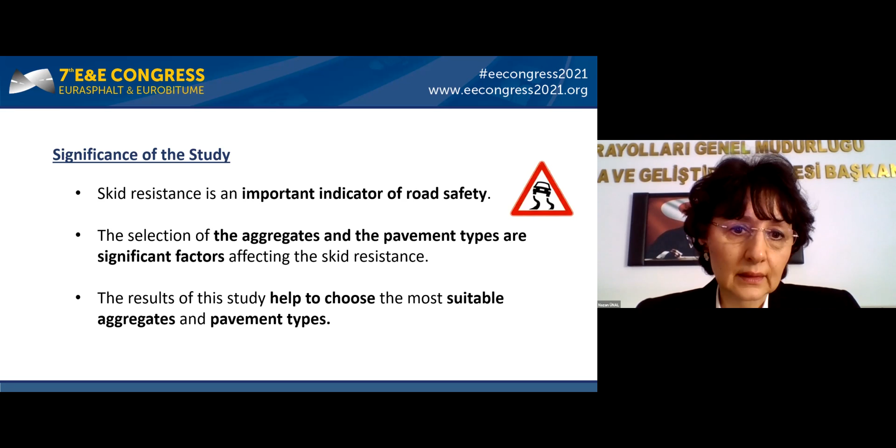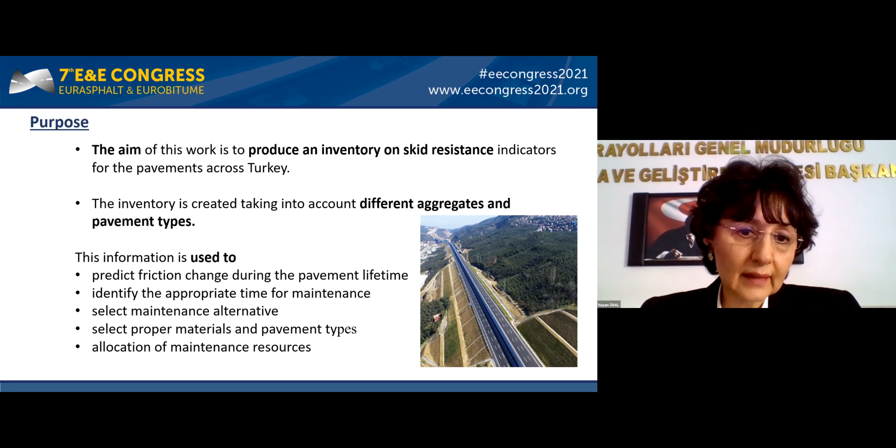The aim of this work is to produce an inventory on skid resistance indicators of pavements across Turkey. The inventory is created taking into account different aggregates and pavement types. This information is used to predict friction change during the pavement lifetime, identify the appropriate time for maintenance, select maintenance alternatives, proper materials and pavement types, and allocate maintenance resources.

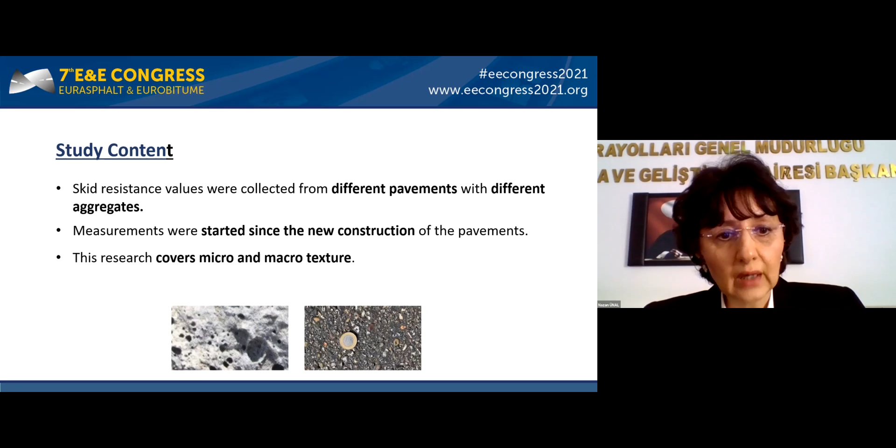Skid resistance values were collected from different pavements with different aggregates. Measurements were started since the new construction of the pavements. The research covers micro and macro textures.

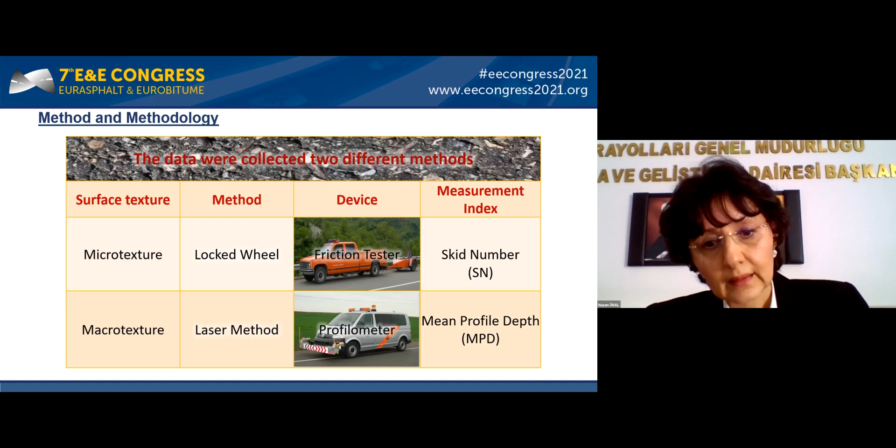The data were collected using two different methods. Micro texture was measured by the locked wheel method using a friction tester; the index is skid number, SN for short. Macro texture was measured by the laser method using a profilometer; the index was mean profile depth, MPD for short.

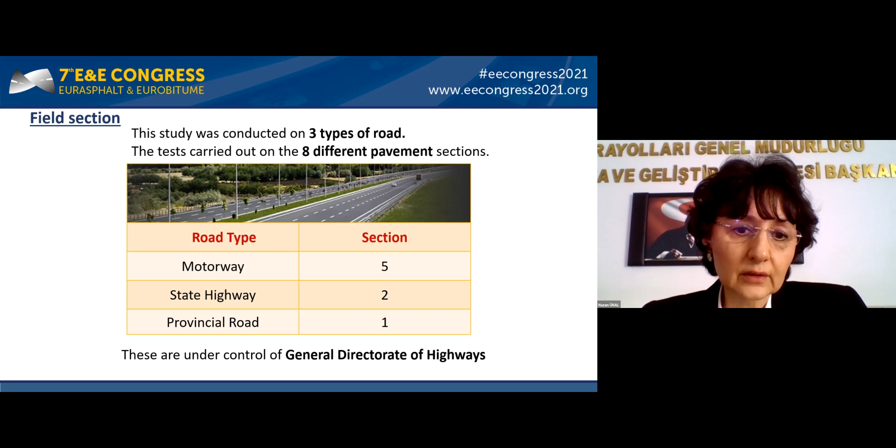This study was conducted on 3 types of roads and 8 different pavement sections. Road types are motorway, state highway, and provincial road, which are under control of the General Directorate of Highways. Pavement types are aggregates used in this study: stone mastic asphalt, dense graded wearing course, and Portland cement concrete. Aggregates are basalts, limestones, granodiorite, and stream materials. Other materials are fly ash and boron. All basalts and limestones were of different origin.

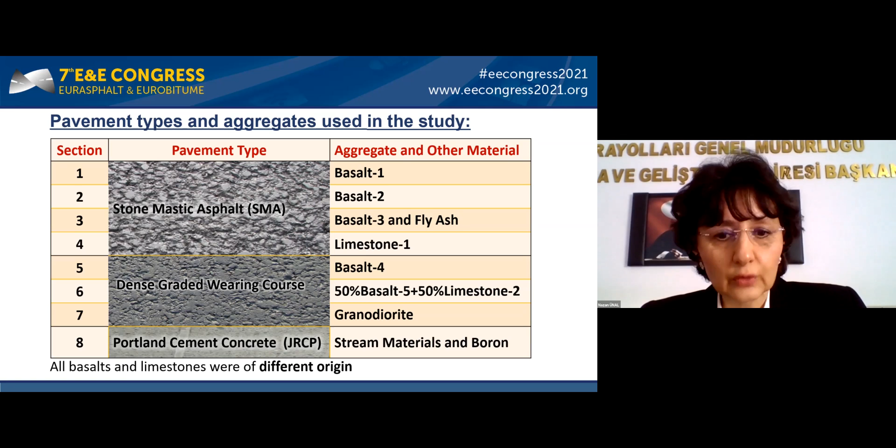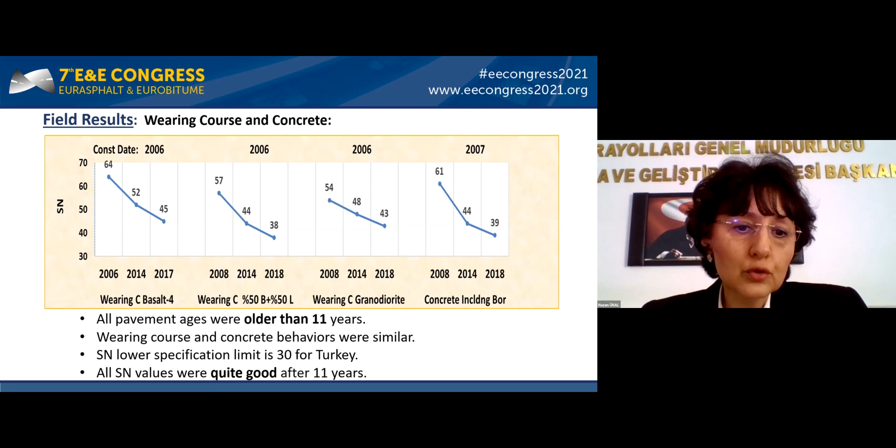The second wearing course is with 50% basalt, 50% limestone. The third is with granodiorite. The last is concrete, including boron. All pavement ages were older than 11 years. Wearing course and concrete behaviors were similar. SN lower specification limit is 30 for Turkey. All SN values were quite good after 11 years.

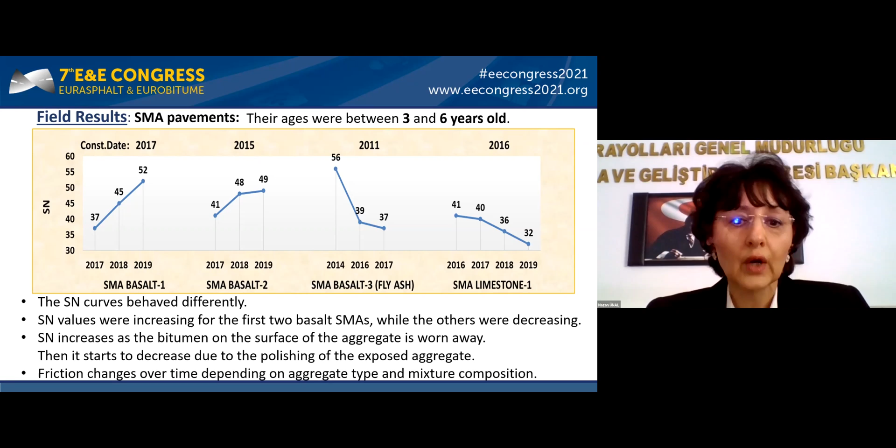SN increases as bitumen on the surface of the aggregate is worn away. Then it starts to decrease due to the polishing of exposed aggregate. Friction changes over time depending on aggregate type and mixture composition.

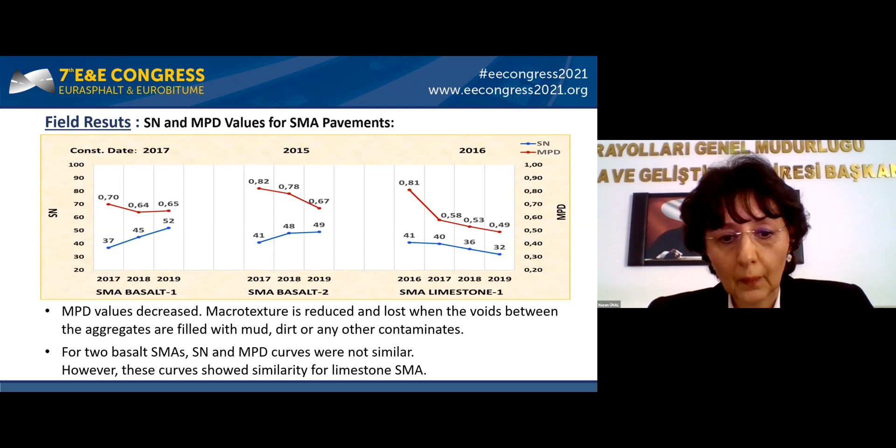Conclusion and recommendation. In this research, the main aim is to investigate the effect of aggregates and pavement types on skid resistance. It is needed to choose the most suitable pavement types and aggregates, and to predict the skid resistance. The results of this study show that different aggregates have different effects on skid resistance even for the same pavement type. Pavements and aggregates should be evaluated together.

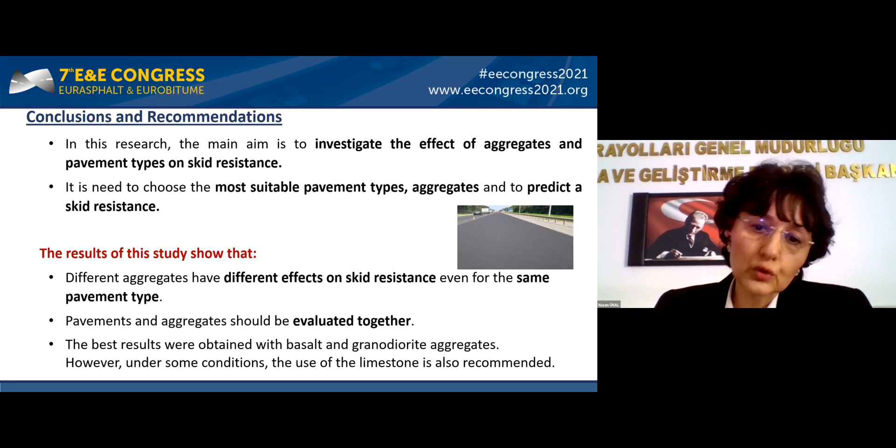The best results are obtained with basalt and granodiorite aggregates. However, under some conditions, the use of limestone is also recommended. Skid number evaluation for SMA. Their ages varied from 3 to 6 years. SN values of basalt SMAs were well conditioned. SN values of limestone SMA were higher than the lower limit. Limestone can be used in SMAs considering the skid resistance life.

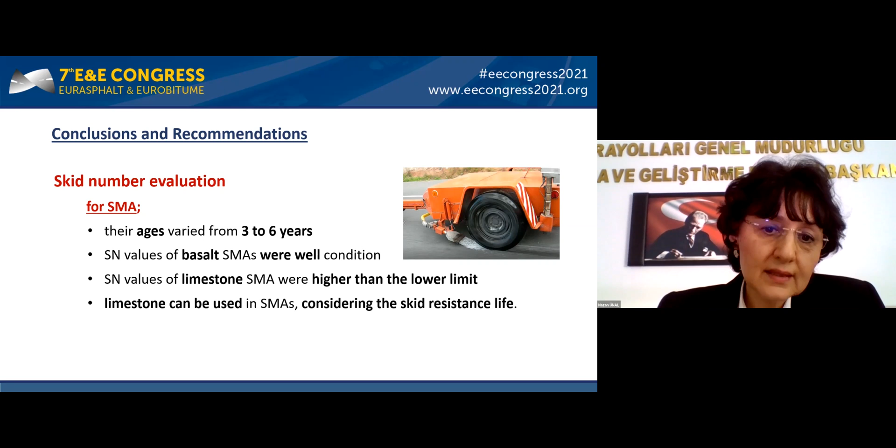For wearing course, all SN values were in good condition after 11 years. Pavements with basalt and granodiorite had better SN values than the 50% basalt and 50% limestone mixture. However, it's recommended to use an aggregate mixture of 50% basalt and 50% limestone because its expected friction life is over 11 years.

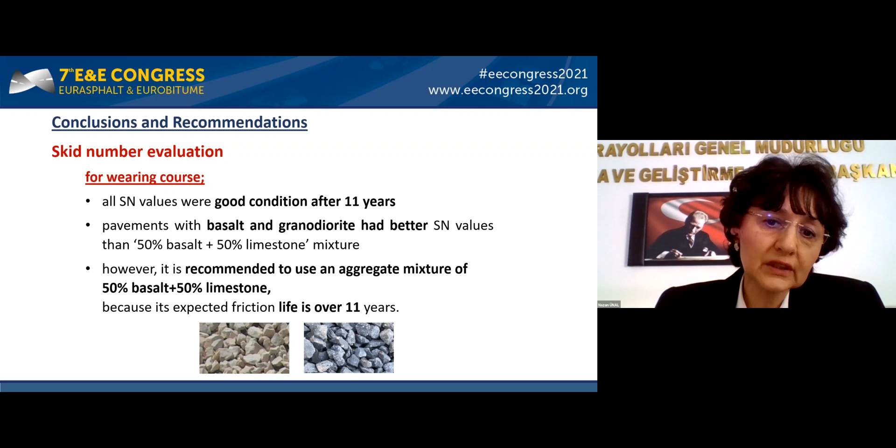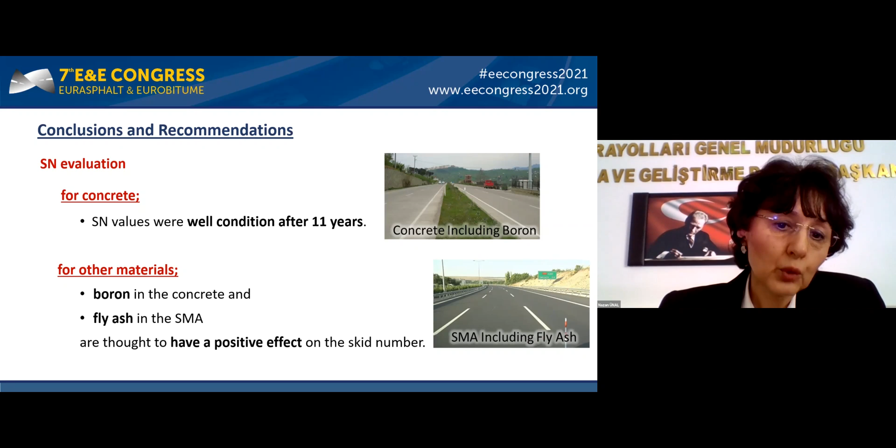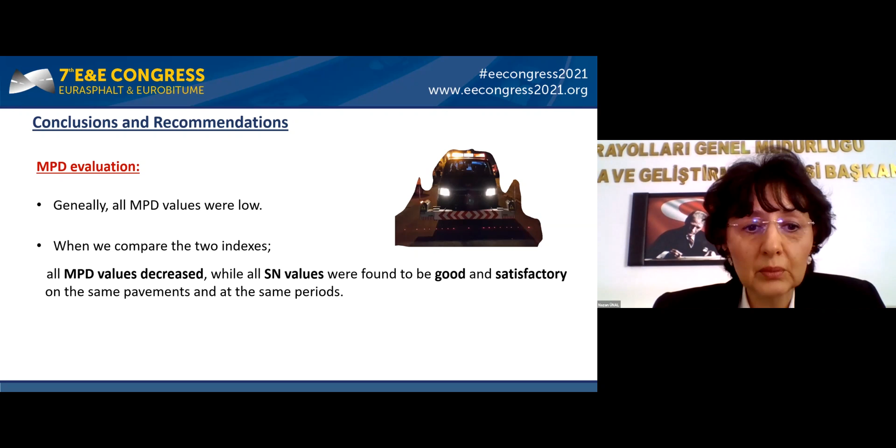For concrete, SN values were well conditioned after 11 years. For other materials, boron in the concrete and fly ash in the SMA are thought to have a positive effect on skid resistance. MPD evaluation. Generally, all MPD values were low when we compared the two indexes. All MPD values decreased, while all SN values were found to be good and satisfactory on the same pavements and at the same periods. Thank you.

Thank you very much, Nazan, for the presentation about a very interesting topic, as it is clearly related to road safety. And let's go, one moment.

He has published about his research in various journals, national and international conferences, and in professional magazines. He has given various presentations about this research for national and international asphalt-related communities. During his research, he worked closely together with 11 Dutch contractors within the ASPARi network, which gives him a unique background and set of skills in asphalt road construction. So let's move on to the presentation entitled "The Road Surface Label Used as Functional Contracting to Stimulate Innovation," a case study on a motorway project in the Netherlands. Please, Frank, the floor is yours.

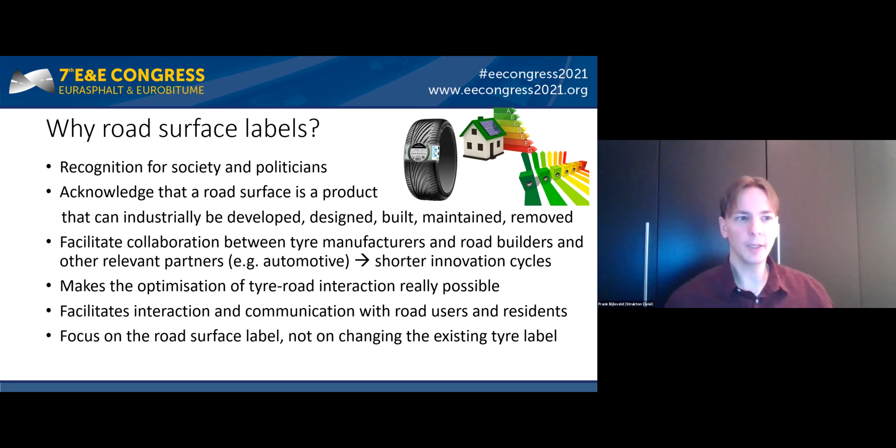Also, it facilitates collaboration between tire manufacturers, road builders and other relevant partners like the automotive industry, leading to shorter innovation cycles. Also, it makes the optimization of tire-road interaction really possible. And finally, it facilitates interaction and communication with road users and residents. And we had the focus on developing a road surface label and not on changing or incorporating the tire label as well.

So some benefits for society, and I've calculated some numbers for the Netherlands, but you can extrapolate the numbers for Europe and worldwide as well. So we believe labeling, road surface labeling, is a method to encourage progress and to stimulate optimization.

And as you can see, the 4 items on the road surface label are skid resistance, noise reduction, rolling resistance, similar as the tire label. And we've decided to add also the lifespan as a parameter on the road surface label. And we believe that there is still a lot to gain on these parameters.

So risk of accidents are 3 times smaller at a proper skid resistance. And in the Netherlands, the road accidents cost approximately 8 billion euros. So if we can improve the skid resistance, there is also a lot to save annually.

Also, regarding the noise reduction, there is 9 dBA noise reduction that seems to be possible by optimizing the tire-road combination and tire-road interaction. This is based on results of a European project Safe and Silent Road Traffic.

Regarding rolling resistance, it seems that there is still 10 to 30% reduction of rolling resistance possible, and this means about 2 to 6% fuel savings. And only for the Netherlands, this means about 488 million liters of fuel and about 1,000 kilotons of CO2.

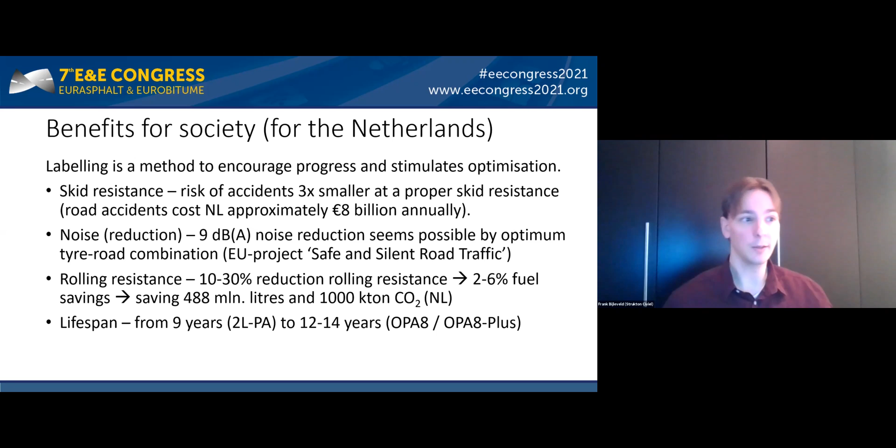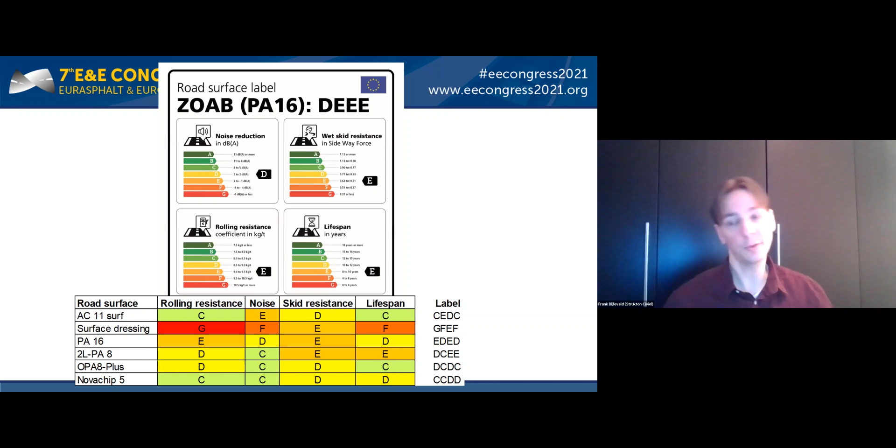Here's an example of the road surface label with the 4 individual items on the label. So noise reduction, wet skid resistance, rolling resistance, and lifespan. And here, this example is a DEEE label. And under the visualization of the road surface label, I've shown the label of various road surfaces. So you can see it varies from about B, C to G finally.

Also, there are various methods available in the laboratory to determine the indicators of the road surface label. And here are some examples regarding noise reduction, rolling resistance, and on the left corner, you can see a machine that was applied in a European project SkidSafe to determine the skid resistance in the laboratory.

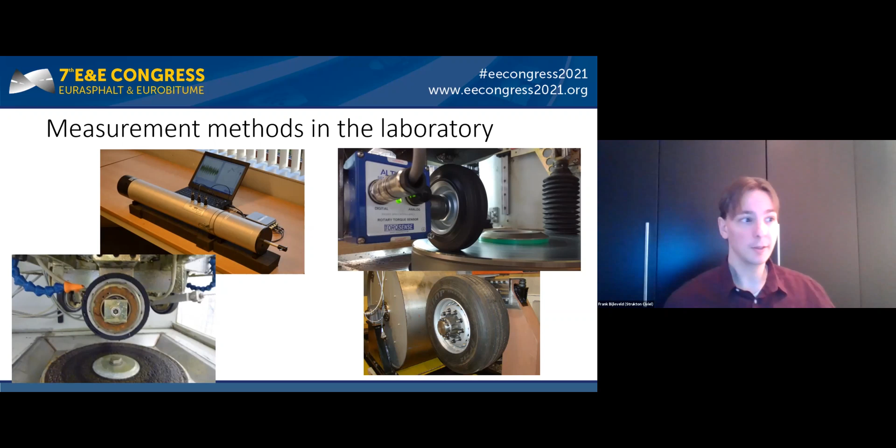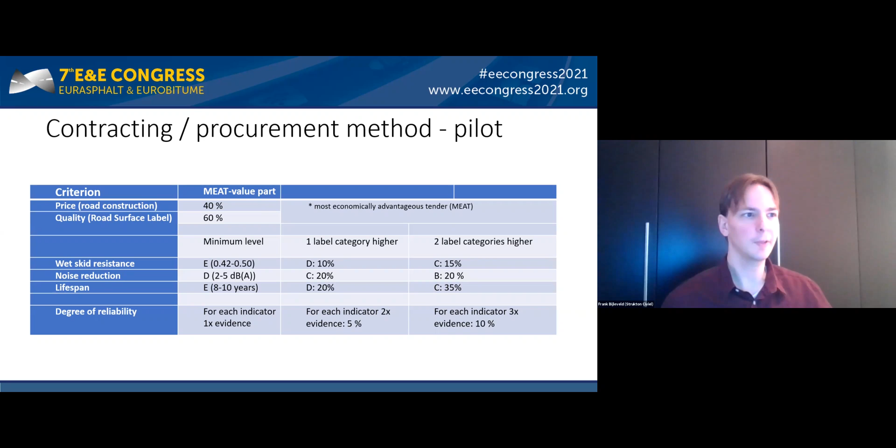Here's the table. You can see the procurement method that was applied. So it was a most economically advantageous tender in which 40% was determined by the price and 60% was determined by the quality. And the quality was determined by the road surface label. So with a higher label indicator for each item on the label, you could score more quality. And more quality means that you had a fictive reduction on the price. And the contract was given based on the fictive price from various contractors.

Here are some examples of the pilot of the motorway project. So we've constructed a 40 millimeter porous asphalt with 20% air voids. We've used a polymer modified bitumen with 5% SBS modification, Sealoflex 5-90 porous asphalt, about 7% filler, 2.5% sand, and almost 85% of aggregate 4/8. And also we've added a binder drainage inhibitor.

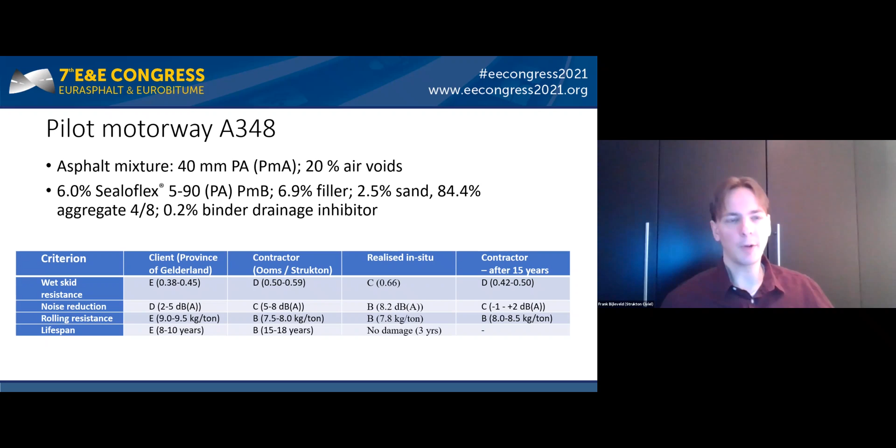In the table, you can see the minimal requirements of the client. So in the first column, you can see that the minimal requirement of the client was an EDEE label. Then the next column, you can see what the contractor promised during the tender phase. So that was a DCBB label. Then there were some measurements conducted directly after construction. So what was realized in situ, you can see that the CBB label was realized directly after construction. And also there was a requirement after 15 years, a DCB label.

Then some conclusions. So we believe that the road surface label would be a step forwards towards professionalizing and industrializing the road construction industry. The described methodology in the road surface label is a first step based on existing practical experience and the latest scientific knowledge. Enormous steps seem to be possible regarding skid resistance, noise reduction, rolling resistance, and lifespan. And we've demonstrated that it can be practically used in tenders for road surfaces

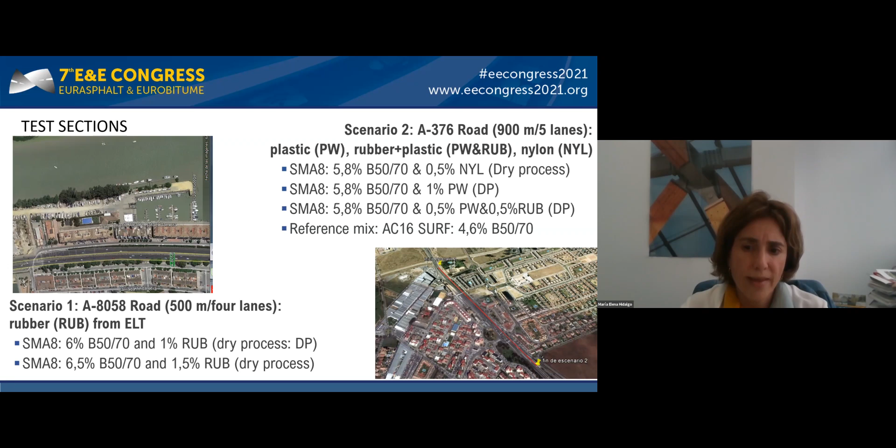In the second scenario, 80,000 vehicles and a speed limit of 80 km per hour, we focus on the use of plastic waste in the mix, either plastic by itself or plastic mixed with rubber. Also, we tested the use of nylon fibers in the single lane on the service road and a reference section of asphalt concrete, which is the common asphalt mix that regional authorities in the south of Spain use on their conventional roads.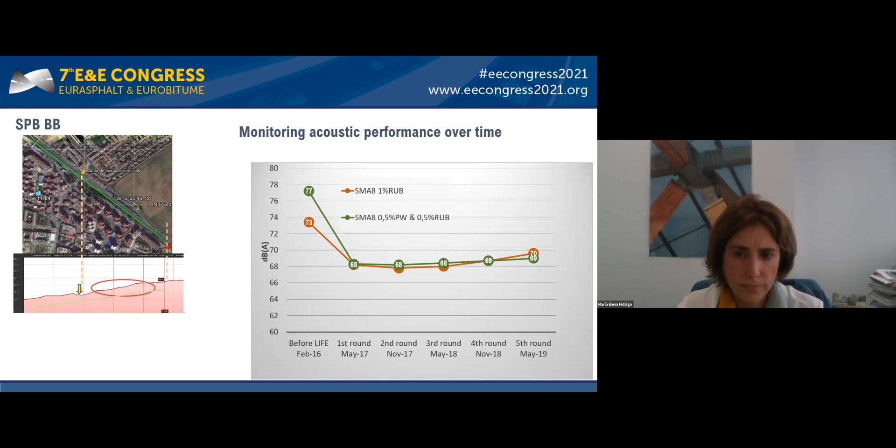Finally, a sound measurement of global noise was done. The major attenuation regarding the initial situation was achieved in scenario 2, where we obtained a reduction of 6 decibels.

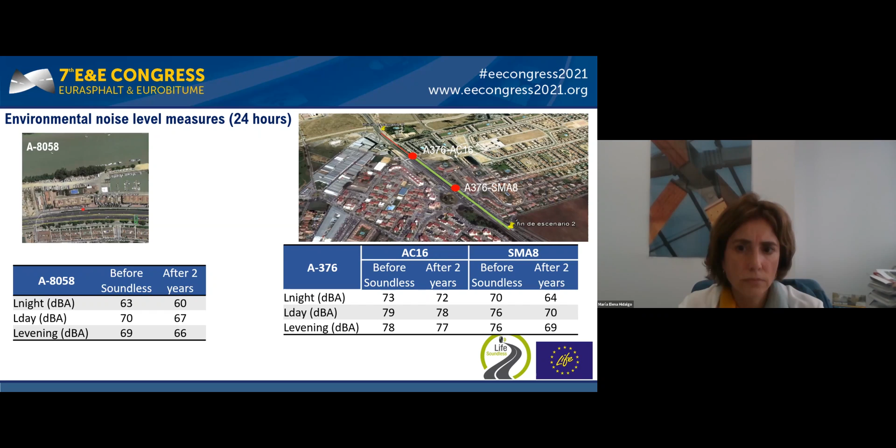Finally, I present the estimated impact on the exposed population after the implementation of soundless asphalt mixes and the consequent impact on the health cost of these people. I have no time here to explain in detail the basis for this calculation, so I refer you to our full paper.

Here, I only want to point out that with the soundless asphalt mixes, we calculated that we could reduce by 70% the number of people exposed to noise level above the permitted Spanish regulation, and we could gain a 50% savings in health cost.

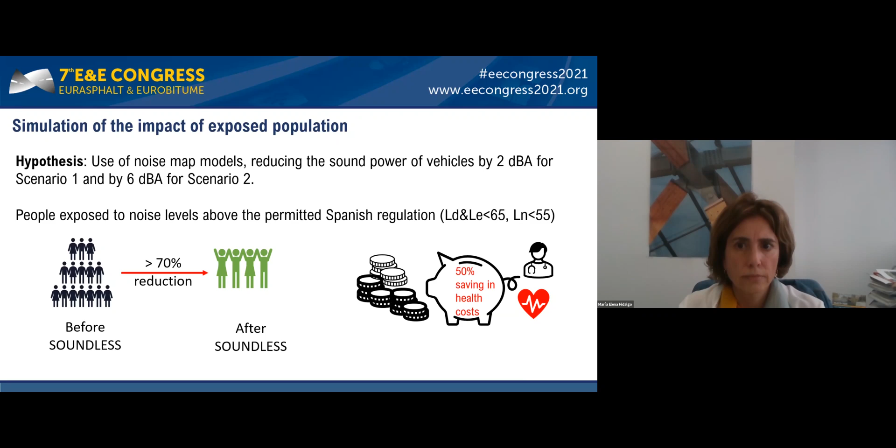Finally, I'm going to finish my presentation with our conclusions. First, the soundless mixes resulted in a noise reduction in the test areas. In urban areas with low speeds, such as scenario 1, the Lday was reduced by 3 decibels.

In an intercity area with average speeds, such as scenario 2, the Lday was reduced by 6 decibels. Second, soundless mixes reduce road noise by 3 decibels compared to a new dense asphalt concrete at low speed and 4 decibels at average speeds.

These values are similar to other studies in places with similar weather conditions. Third, the recycled materials used in soundless mixes have been shown to be effective in reducing rolling noise by stabilizing a higher bitumen content. And fourth, the reduction of affected population estimated by noise map models shows that the soundless mixes are effective solution for noise problem in urban areas.

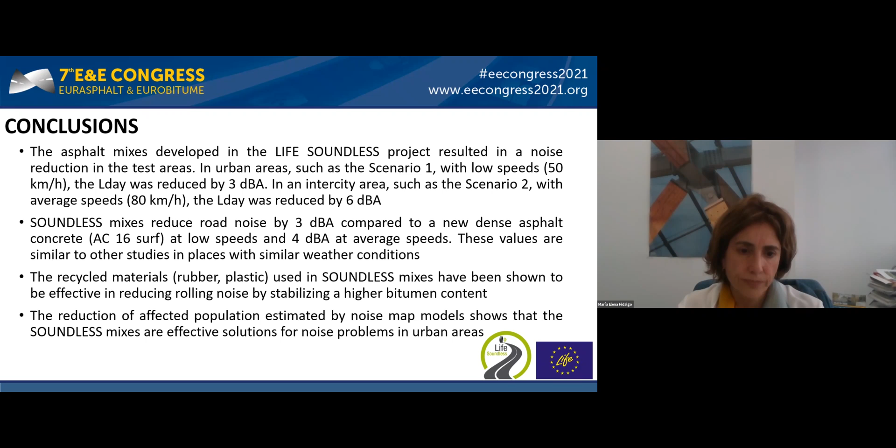Thank you for your attention.

Thank you very much, Maria Elena, for your superb presentation, focusing on a quite interesting thing from my point of view, that is the noise reduction, but in the long term, checking how a pavement behaves along the years.

Let's go to the next presentation, shown by Lionel Grin. He has been working in public road works for the past 20 years. Today he is Technical and Innovation Director at Eurovia for the Paris area and Normandy. He is particularly involved in the various technical issues impacting our regional work sites, and in particular in the field of mastic asphalt and asphalt mix. His main concern today is to help develop new solutions in light of environmental issues.

Research shown in this paper intends to demonstrate how we can modify asphalt formulation to fight against two main urban disturbances: noise and excessive heat during hot weather conditions. Let's move to the presentation titled Cool and Low Noise Asphalt LIFE Project in Paris. Lionel, the floor is yours.

Good afternoon. It's a pleasure to be here today and to participate at the 7th Eurasphalt and Eurobitume Congress. During this virtual session, I will make a short presentation of the Cool and Low Noise Asphalt LIFE project in Paris.

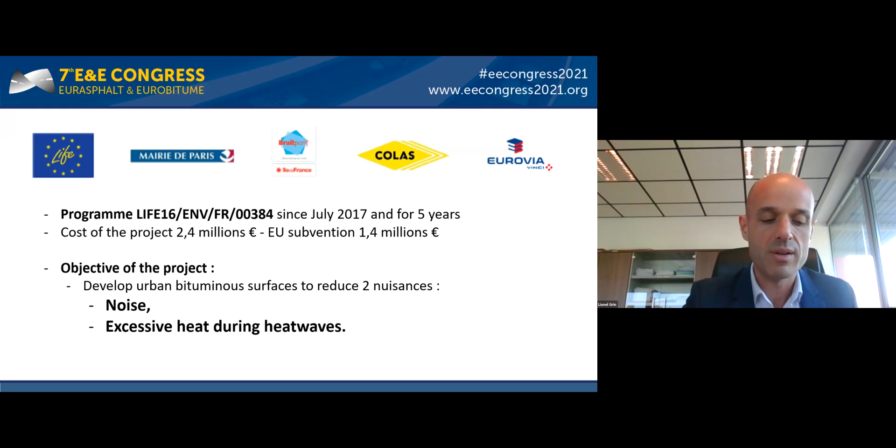The City of Paris is very sensitive to environmental protection and is implementing a proactive policy to improve the living conditions of its inhabitants and combat the effects of global warming. These actions are carried out within the framework of the Environmental Noise Prevention Plan and the Air, Climate and Energy Plan.

The targets of the project are the following. Concerning microclimatic effects, we can expect that real temperature drops by 2 degrees and that felt temperature drops by 3 degrees Celsius. Concerning phonic properties, we can expect -3 decibels at street level and -2 decibels on the other side.

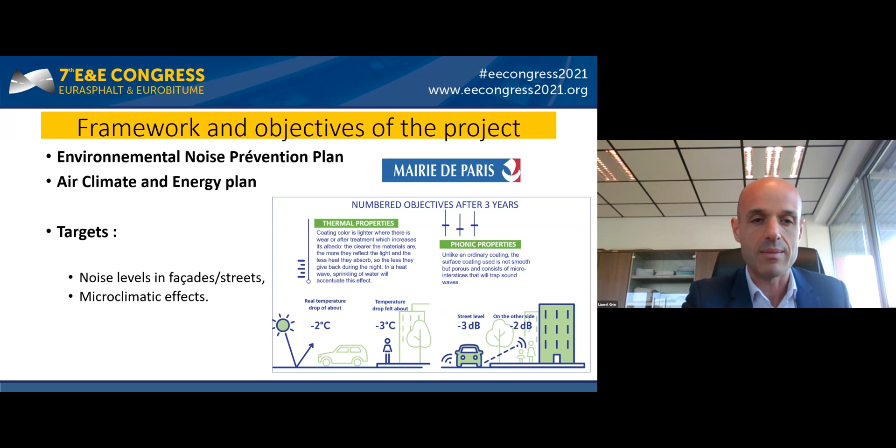The main steps of the project that we will now quickly describe are the following: first, formulation of innovative materials, SMA phon, BB phon+, Puma; then the choice of sites, sites instrumentation, the realization of the experimental test sections, monitoring of the experimental sections, and at last but not least, communication and dissemination.

Firstly, I will make a focus on the formulation, and I will begin with compacted asphalt mixes. The reference was a type A thin asphalt concrete mix of 0-10 discontinuous granularity with a polymer modified binder. This is the reference in surface layer maintenance for the city of Paris. Its application thickness is 4 cm. The innovative products had to be usable instead of this product, with the same thickness, durability, and low additional cost.

The first option was to start with a stone mastic asphalt, SMA, 0-10 type surface coating, known for its high durability, and improve its phonic properties by increasing the voids content and reducing the aggregate's size. The second option was to start from a very thin asphalt concrete, BBTM 06 formula, known for its low rolling noise emission, but characterized by poor resistance in urban environments, and improve its durability without excessively penalizing its sonic properties.

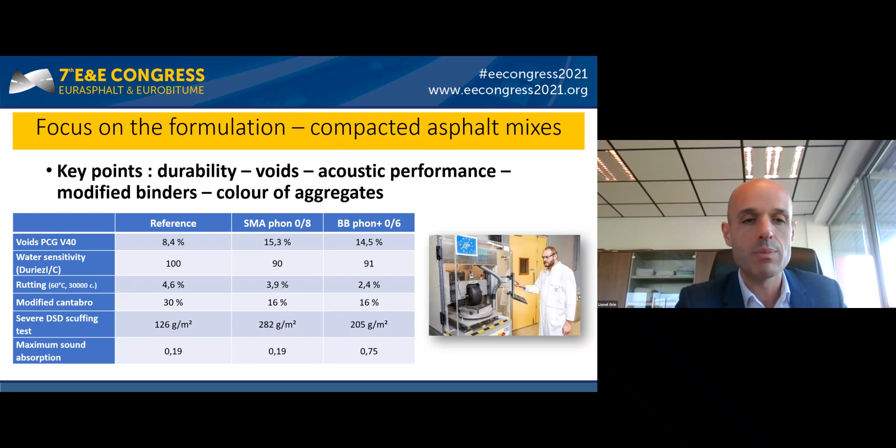The thermal aspect is achieved through the use of clear aggregates in this mixture and the preservation of a microtexture to ensure sufficient surface water retention during spraying operations. You can see on the slide the main characteristics of the two compacted asphalt mixes. For these products, the key points are durability, voids, acoustic performance, modified binders, and color of aggregates.

I will now talk about mastic asphalt. Historically, the city of Paris has always frequently used mastic asphalt technology for both sidewalk and street surfaces. Mastic asphalt must therefore meet the dual objectives of acoustic comfort and reducing the urban heat island effect.

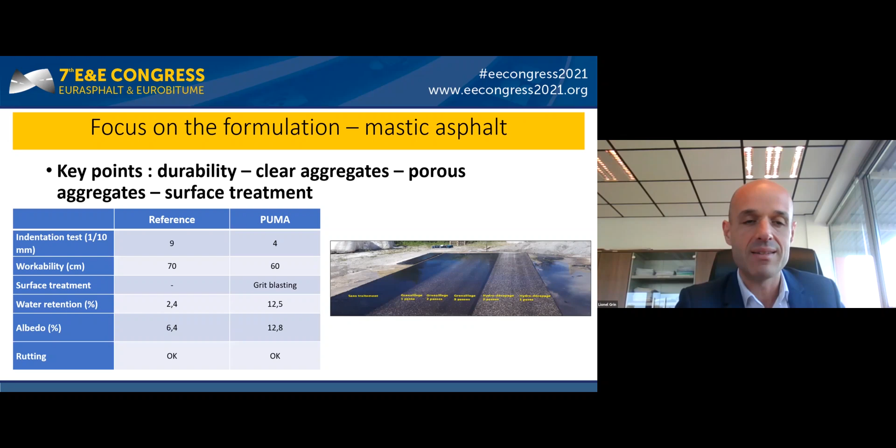This product, the Puma, has been developed according to two principles: combine the albedo properties of a light-colored aggregate with the porosity of lightweight aggregates. A surface treatment is carried out to remove the surface bituminous mastic and highlight the light and porous aggregates. You can see on the slide the main characteristics of the Puma: durability, clear aggregates, porous aggregates, and surface treatment.

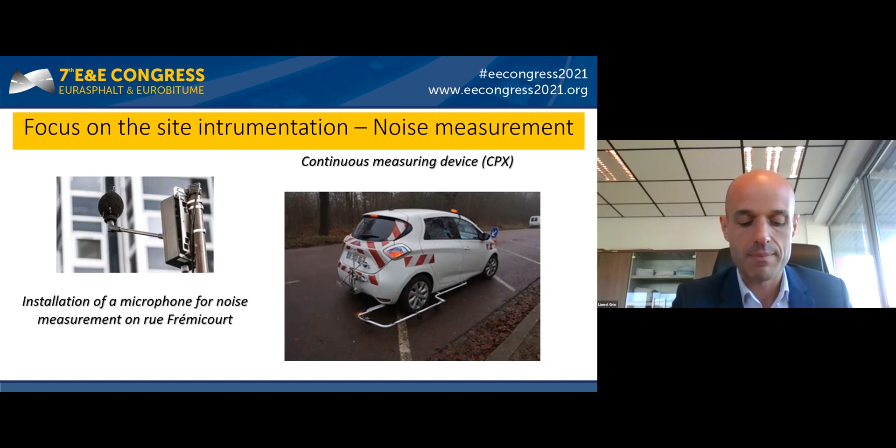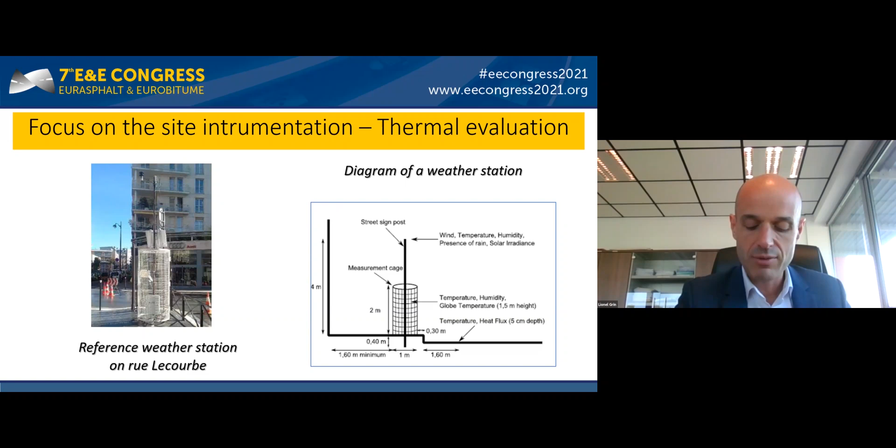The second point of instrumentation concerns the thermal evaluation, as illustrated on this slide. The thermal component of the project includes monitoring of performance indicators based on an evaluation of the albedo effect and an evaluation of the watering effect of the innovating surface coatings. In order to better characterize the thermal behavior of innovative road surfaces, temperature and heat flow sensors were installed directly under the surface coatings.

On this slide and the following, you can see illustrations of the experimental sites. Each pilot site has two sections of approximately 200 meters long: one with the traditional reference surface and the other with the innovative asphalt mix.

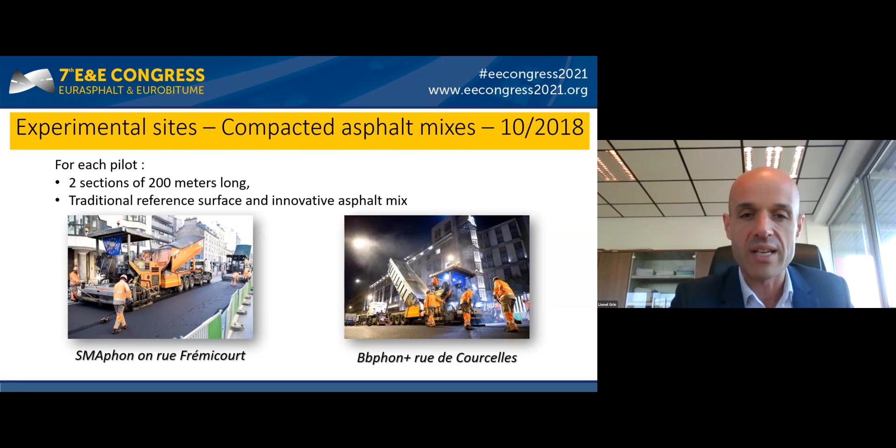You can see the application of the SMAphon on Rue Frémicourt, and the Bbphon+ on Rue de Courcelles. On Rue Lecourbe, Puma Experimental and the AC2 reference mastic asphalts were applied in September 2018. The innovative Puma was applied and grit blasted one month later to reveal the clear aggregates.

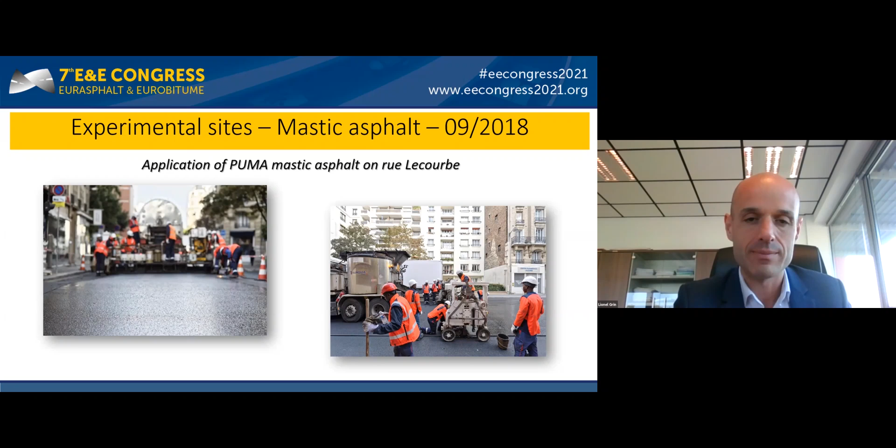On this slide and the followings, you can see the first results. The project is the subject of an annual meeting of the Scientific Committee and a Stakeholders Committee, the last of which met in February 2021. The experimental sites will be monitored until 2022, and more if positive results.

Today I don't have enough time to go into the different results, but concerning noise as well as microclimatic measurements, you can see the real effect of the innovative solutions in comparison with previous pavements or with the references. This first table presents the CPX measurements for the three pilot sites.

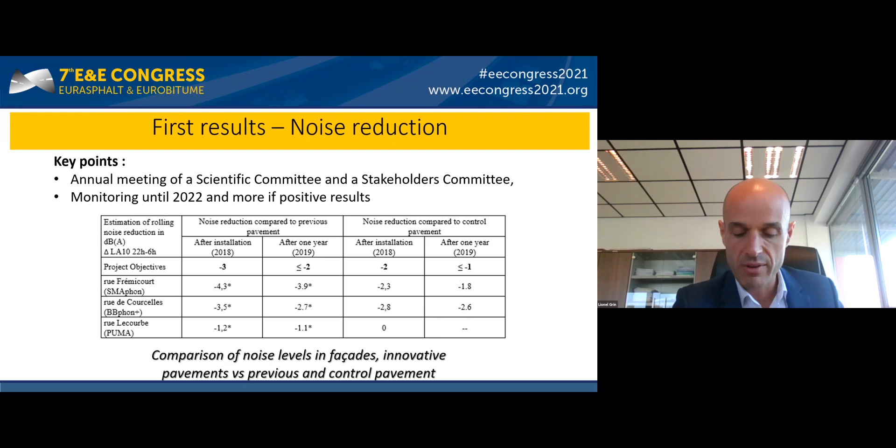As a conclusion, I would say that the project shows that it is possible to reduce both traffic noise and temperature peaks using specific innovative asphalt pavement and watering. The monitoring of pilot sections will continue and provide long-term information in the next years.

Thank you, Lionel, for your interesting presentation about clearly topics that are on the agenda of, I think, most of the citizens. And now let's go to the following Q&A session. I have several questions, let me check.

The first one is for Maria Elena, and it says: when you use plastics, how did you differentiate in terms of chemical composition? Plastic covers a wide range of products with different characteristics and also different potential impacts, for example on health, safety, and environmental aspects. How did you specify the consistency of the material received and used?

Yes, she's right when she said that plastic, there are very different types of plastic, but in the project we only use low density polyethylene from the greenhouse crops that are very common in the south of Spain, as well as plastic from wiring cables, specifically the cover of the wiring. So these plastics are all low density polyethylene.

A bit of background: as you all know, bitumen is complex in its composition, and it contains very long hydrocarbons, predominantly longer than C25. During paving at elevated temperature, bitumen emissions and asphalt emissions can form as gas, vapors, and aerosols. Generally, you measure the fumes in mass as total hydrocarbons, and you can't distinguish bitumen itself - it's all the total hydrocarbons present in the air, measured as milligrams per cubic meter.

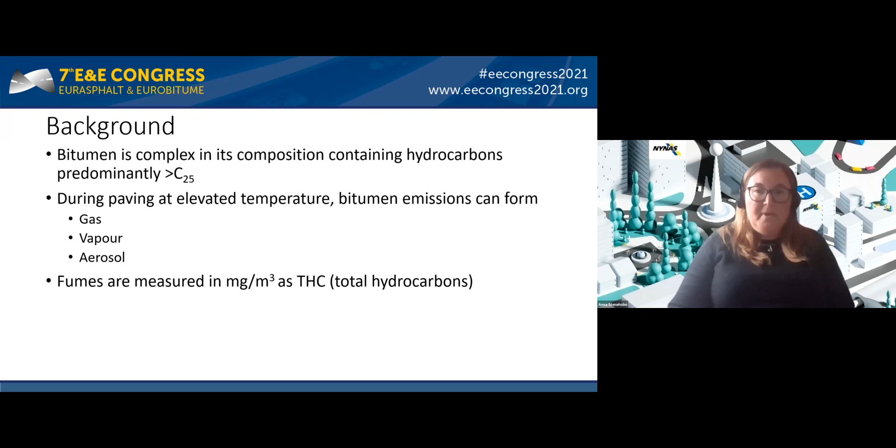There is no real definition of low temperature asphalt, but generally it means that you pave, for instance, at 20 to 40 degrees lower than the equivalent conventional asphalt. That means about 100 to 140 degrees Celsius.

When you measure the amount of fumes in the air during paving, there's also a possibility to measure confounders, since the hydrocarbons measured in the air can also pick up diesel exhaust from the equipment, road dust, and also additives, of course.

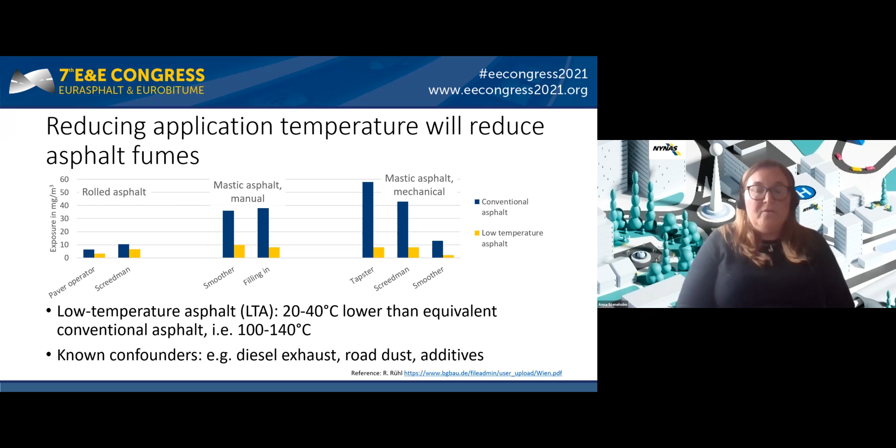But in this study, we are not so interested in the mass of the fumes, but rather the particles. Why the particles then? Particulate matter, or PM as it's also called, is a known risk factor for adverse health effects, and the size is an important parameter here.

PM10 is a size fraction, meaning the diameter of the particle is less than 10 micrometers. PM2.5 is less than 2.5 micrometers. And ultrafine particles are really small - less than 100 nanometers in diameter.

The small particles contribute very little to the total mass of the fume. Here instead, the number of particles is very important, so you count them.

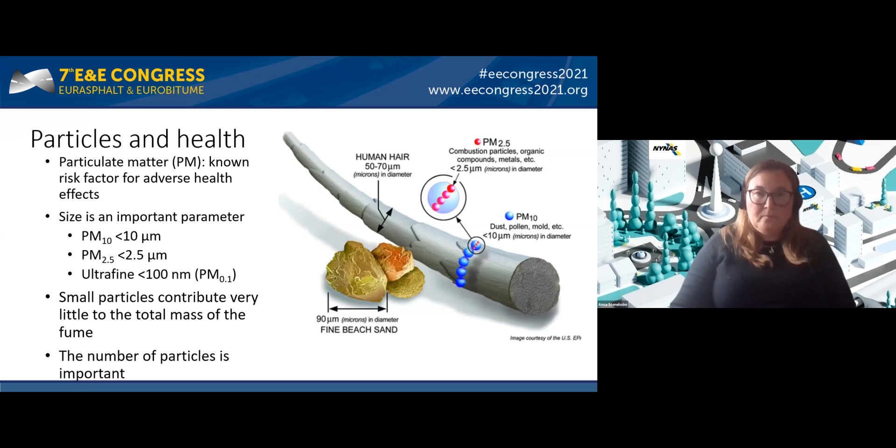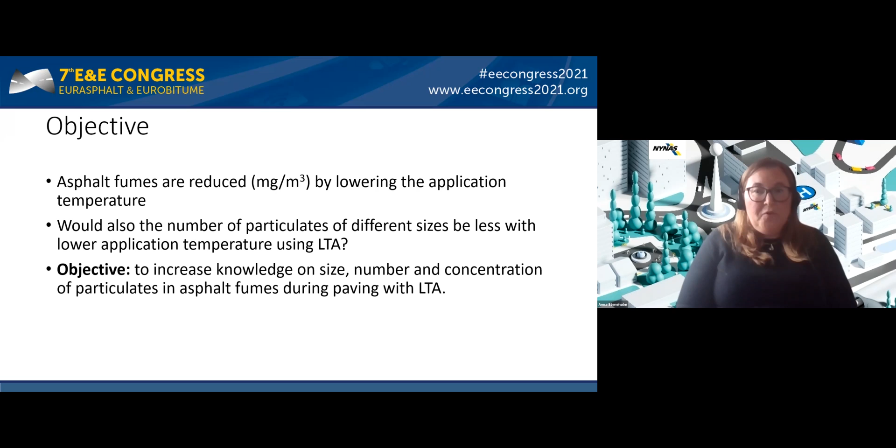As I said, the asphalt fumes are generally reduced by lowering the application temperature. So now we wonder, would also the number of particles of different sizes be less with a lower application temperature using low temperature asphalt? So the objective of this study is to increase the knowledge on the size, the number, and the concentration of particulates in asphalt fumes during paving with low temperature asphalt.

So this is the method, what we wanted to do. We wanted to pave with low temperature asphalt at 140 degrees. We used KGO, which is an asphalt without any additives. We could measure over 2 days, 8 hours each day. We wanted to measure the amount and the size distribution of particles in the range between 15 and 5,000 nanometers - so quite a big range.

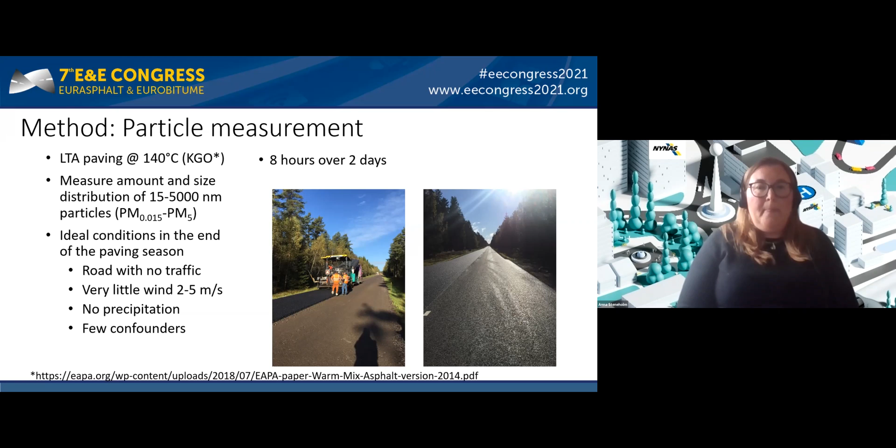And then behind the paver, you have a trolley with all the equipment. And behind the trolley, you have a generator to run the equipment on the trolley. And they are all with well distance behind, like 5 to 10 meters in between each other.

On the trolley, you have all this equipment in order to measure the endpoints. You have the scanning mobility particle sizer together with an aerodynamic particle sizer and a PM10 inlet.

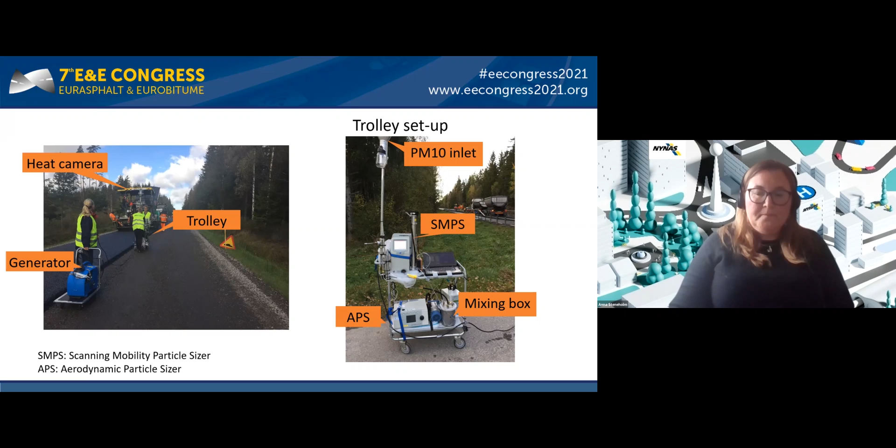So what were the results? If you look at the average particle concentration, the background when measuring was 1,500 particles per cubic centimeter. And during the paving with low temperature asphalt, it was 7,000 particles per cubic centimeters.

Looking at the size, we looked in the range of 15 to 5,000 nanometers, and 80% of the particles in this range were ultrafine, meaning less than 100 nanometers.

We managed to pave a few kilometers at 125 to 140 degrees Celsius. We had very few passing vehicles every hour, and when they passed, we deducted these particle measurements from the final results, not to have any extra confounder there.

And we only used data which was twice as high as the background, which in the end was 70% of the data that was actually measured in the peak of the plume behind the paver.

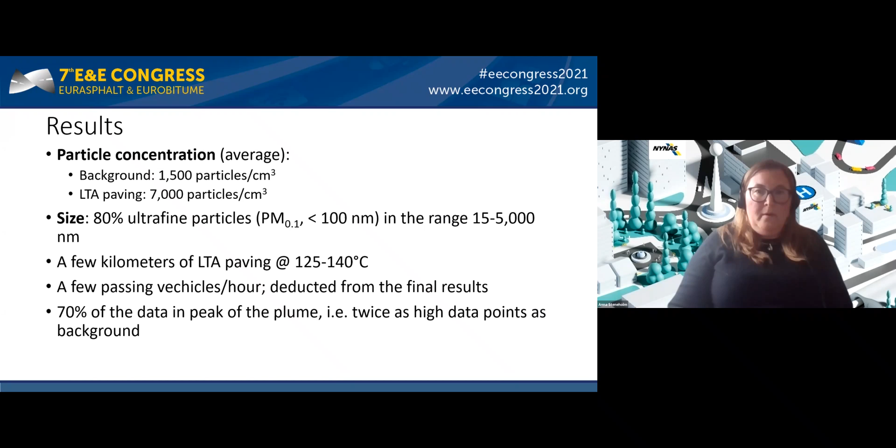Unfortunately, in this study, we were not able to compare with 160 degrees conventional paving. That was not possible to do during this campaign. Instead, in order to compare with the results, there are a few comparable studies available in the literature.

First, focusing on the particle concentration. In the current study, we had 7,000 particles per cubic centimeter. Whereas if you compare that to the literature, there is a study looking at conventional paving at the highway, and that was 27,000 particles per cubic centimeters, reported by Elin.

And another study where they studied crumb rubber paving, and there they have quite higher numbers, 20,000 to 140,000 particles per cubic centimeters in comparison, so quite a lot more.

Looking at the mean particle diameter, we saw in the current study the mean was 55 nanometers, and we have more or less the same in the other two studies, seen at the highway and also paving with crumb rubber at higher temperatures. And just for comparison, the typical particle concentration in ambient urban air in Lund, which is a city in Sweden with 90,000 inhabitants, the background in such a city is 7,000 particles per cubic centimeters.

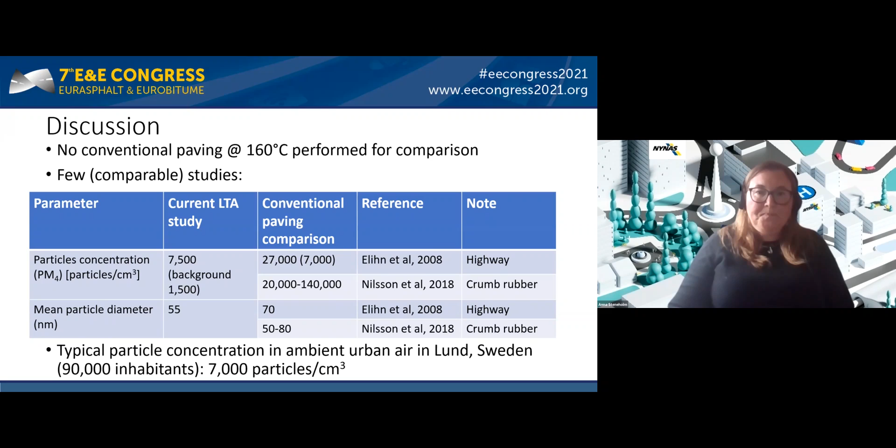So to the conclusions. This very first measuring campaign shows that low temperature asphalt paving caused low particle concentrations in the air, and these are comparable to a common particle concentration in just ambient urban air. And it generates considerably less particles than measured at higher temperatures during conventional paving in comparable studies.

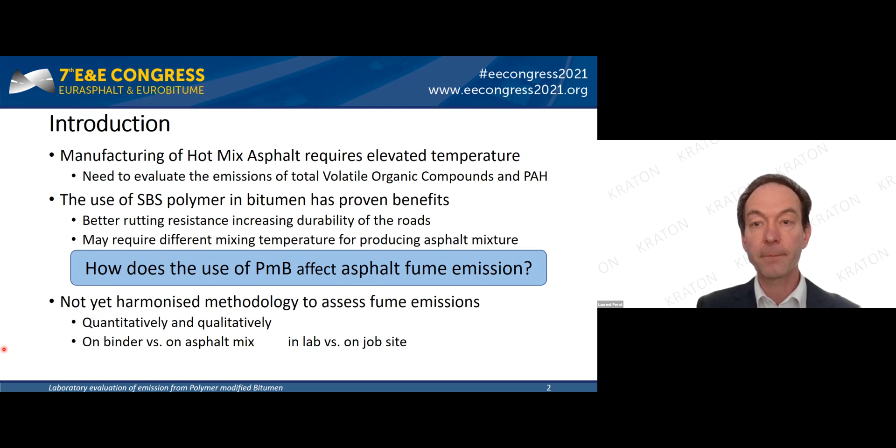Let's go first through the experimental plan. All measurements were made on bitumen level. For this purpose, a neat bitumen 50/70 was used as a reference bitumen, and two PMBs were included. The first one was a standard PMB 45/80-55 using 3.5% SBS D1101. The second one was a highly modified bitumen with 7.5% of vinyl SBS polymer D0243, using the same reference bitumen 50/70 as a base bitumen.

The test was run at 4 different temperatures, 140, 160, 180 as common possible mixing temperatures, and 200 degrees Celsius as an extreme case. All measurements were made in duplo. The common gas chromatography and mass spectrometry was associated with initial thermal desorption, aiming at improving accuracy of measurement. More specifically, for the PAH detection, an initial calibration of the methods was made with a standard mixture containing the commonly recorded 16 PAH foreseen in bitumen.

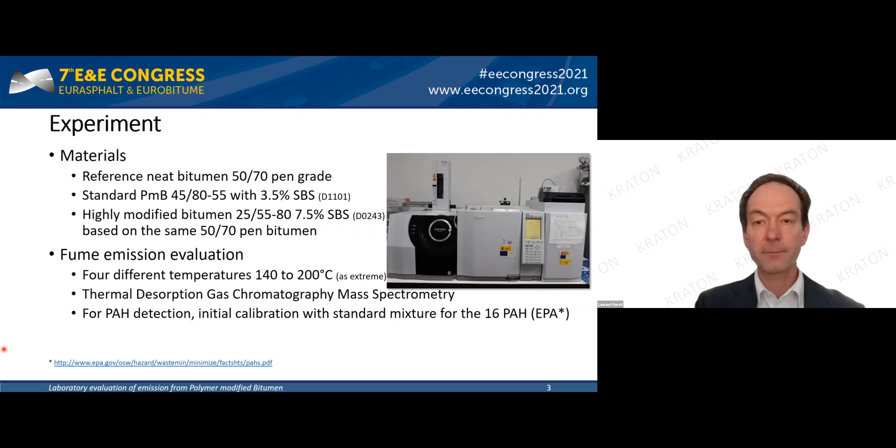First, here are some physical properties. For the service temperature, at ambient temperature, the consistency, as recorded with penetration value, for the three binders was in the same range of order. While for the high temperature, the softening point temperature, the consistency for the PMBs displayed higher values than the reference bitumen, with 10 degrees Celsius for the standard PMB, up to 40 degrees Celsius for the highly modified one. Commonly, in fact, softening point temperature for this binder is about 85 degrees Celsius.

Because of higher softening point for the PMBs, these binders display higher viscosity at elevated temperature. However, the highly modified one did not increase significantly more as compared to the standard PMB. This is due to the choice of the SBS polymer having high vinyl content, which keeps the viscosity in a feasible range, even at high concentration in the binder.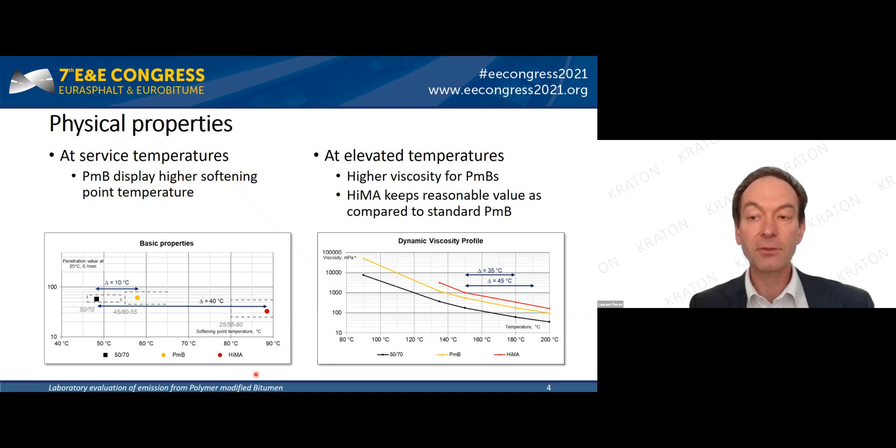For volatile organic compounds, the analysis was made directly with the GC-MS spectrum and recorded in 3 families: the alkanes, the monocycloparaffins, and the alkyl benzenes. The total peak areas were used and considered as proportional to the quantity of emissions of the considered species. The results are presented in a relative way, knowing it was related to 3 grams of bitumen for a headspace volume of 0.02 liters.

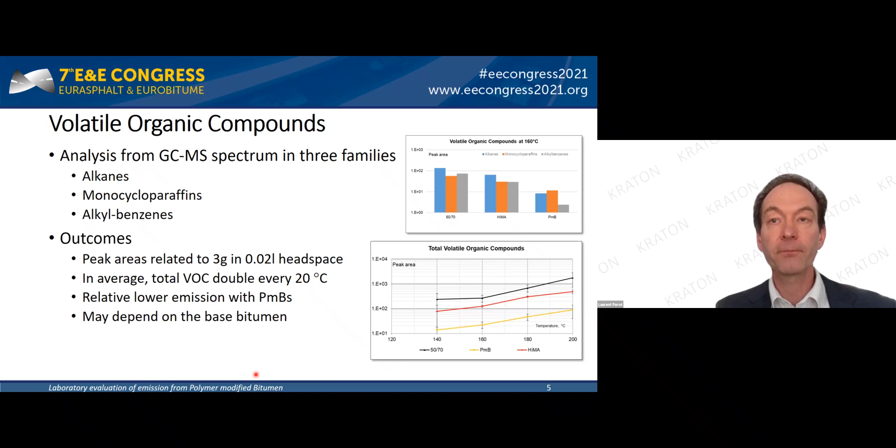On average, it was observed that for every 20 degrees Celsius temperature increase, the total level of emissions was multiplied by 2. And in the case of PMB, as compared to the reference neat bitumen, there was relatively less emission. It may come from the fact that the base bitumen is already processed at elevated temperature during the production of the PMB, and thus may already release part of the organic components. This may be also dependent on the base bitumen used.

Polycyclic aromatic hydrocarbons were determined using an acquisition mode performed in multiple reaction monitoring. First, the measurements were calibrated with a specific mixture of 16 PAH to track. This initial step validates that the PAH can be detected, and then the calibration of the signal of each PAH with the known concentration. Again, the measurements were related to 3 grams of bitumen for 0.02 liter headspace.

The total PAH emission was consistent with the VOC. The higher the temperature, the more recorded PAH emissions. And for the PMB, somehow, lower levels than the reference bitumen. Again, it may depend on the base bitumen used. Qualitatively, naphthalene was the highest contributor of the total detected PAH, the blue bar here. Although surprisingly, a very low level was observed for the standard PMB.

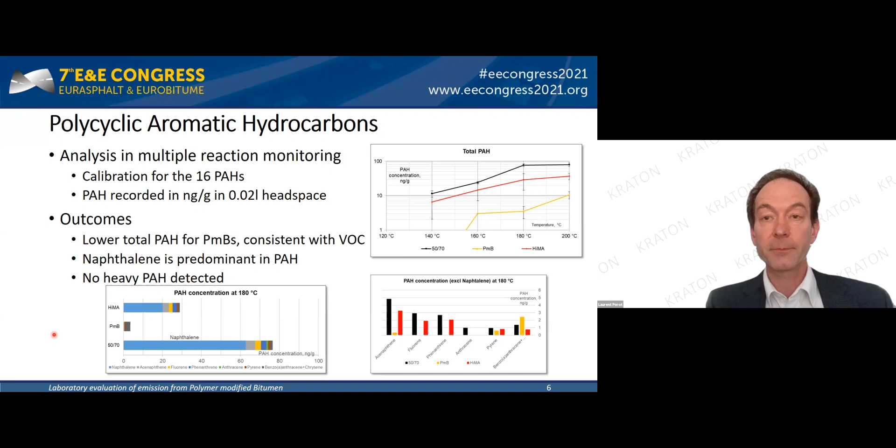Overall, no heavy PAHs were detected, which are often the bad boys. In conclusion, while PMB clearly brings some value to enhance the high temperature properties and rutting resistance, it may also require higher asphalt mixing temperature. Thus, the analysis of the emitted emissions is important to investigate.

A new approach was used in this study with thermal desorption coupled with gas chromatography and mass spectrometry. The total VOC was observed to increase by a factor of 2 every 20 degrees Celsius, something which was already reported in literature. However, in the case of the PMB, at a given temperature, the level of VOC was lower than the reference bitumen. This may be a result of the production of the PMB before.

In the PAH analysis, naphthalene is the predominant PAH detected and no heavy PAHs were detected. The same trends as VOC for the PMB have been observed, with, at a given temperature, less emission and at least no additional harmful compounds.

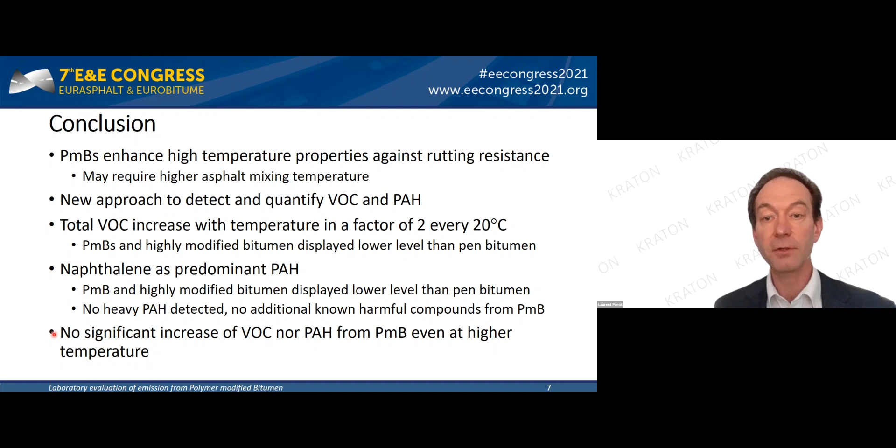I think at this moment, most of them are addressed to Anna because people need some time to write down the questions. The first one, Anna, is from Christina Smith. And the question is, Anna, when you said that additives were confounders, does that mean that they increase PM emissions? If so, what sort of additives do this? Which additives cause the most PM emissions?

Thank you, Christina, for that question. As I said, this was the first study monitoring what happens to the particles when we pave with low temperature asphalt. Generally, we do this by measuring the mass of the fume, just measuring total hydrocarbons. And we know from these measurements that additives and diesel exhausts and other types of confounders can be present when you measure. So in this study, we tried to really minimize anything that could possibly be a confounder.

If additives would be a true confounder in the end, we don't know that, but we wanted to exclude the possibility at least. And that could, of course, be a new study to see if additives truly would be a confounder or not, because at this moment in time, we don't know this. But now we just focused on the asphalt and the bitumen as such. Okay, thank you very much, Anna.